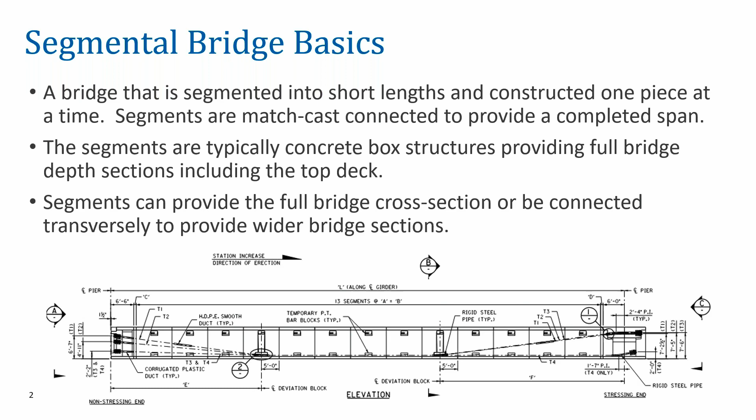The segments are typically concrete box structures providing full bridge depth sections, including the top deck. That's what makes it unique: the girder itself, with the top deck, is cast in one piece, comprising the full girder cross section, which is then assembled jointly together to complete the spans. The segments cast can either provide the full bridge cross section width, or for wider bridge sections, be done in individual pieces and connected transversely together at the erection site.

So why would your project choose segmental construction?

One of the reasons we're here today is the benefits that it offers for accelerated bridge construction. It provides a repetitive process for efficient construction, and constructing the full bridge section minimizes forming and finishing work at the construction site. You may utilize them in complex site and environmental constraint conditions, and the segmental solution can provide a reduced footprint and offer top-down construction in these occasions.

It may also find use for economical long span bridges, and they're particularly well suited for elevated viaducts and rail transit bridges. The narrow piers and narrow girder soffits require minimal clearance in confined areas, so bridges can be built in the medians of existing right-of-way. The bridges can also follow the curvature of the rail, and in transit bridges, the rails can be positioned directly over the webs, reducing the demand on the top deck and making for a more efficient structure.

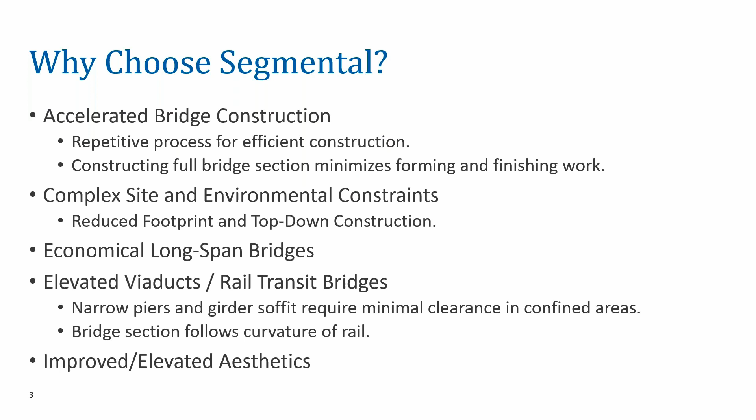They also offer improved elevated aesthetics if that's a desire for your project. So ABC and segmental bridge construction, how do they fit together?

The mission of ABC is to reduce the societal cost of bridge construction by reducing the duration of work zones, focusing special attention on preservation, service life, construction cost, education of the profession, safety, and development of a next generation workforce fully equipped with ABC knowledge.

An important component of that is reducing the duration of work zones. The less time that the traveling public is impacted, the more benefit it provides to the traveler, reducing costs, and potentially even improving revenue for the owners.

Precast segmental construction can meet these objectives by providing rapid precast segmental erection techniques, reducing the construction footprint, which thereby reduces the impact on travel lanes and disruption to the traveling public. Special erection methods can be implemented to reduce traffic closure durations, so operations can be performed at night or during weekends, during minimal hours, and the facilities reopen during peak travel times.

The Federal Highway Administration Accelerated Bridge Construction Manual states that precast segmental construction can be considered an ABC method because it's faster than cast-in-place segmental construction. And I would add that it's also faster than cast-in-place bridge construction in general.

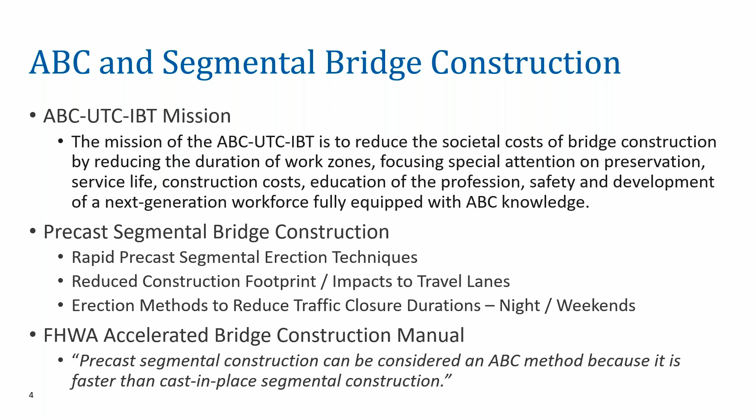Here's an overview of the general segmental bridge types. There are principally two methods used for segmental construction: the cast-in-place and precast balanced cantilever methods, and the precast span-by-span method. The remaining methods are really variations of these two primary methods.

The unidirectional cantilever method is a variation of the balanced cantilever, in which the same procedures are implemented, just done in one direction only. Incremental and progressive launching is similar to the span-by-span method, where the bridge is assembled at the end of the bridge and then launched into position.

Cable stay and extrados bridges are a variation of the balanced cantilever method, in which segments are erected first to the piers and then progressively out from the piers in a balanced fashion. Unique applications of segmental construction include arch construction, as well as precast segmental substructure.

One thing I'd particularly like to point out in the photo on the right is, as we look at the different methods being utilized, on the left side of that image is a traditional cast-in-place concrete structure constructed on falsework, and on the right side is the extrados precast segmental bridge construction. Transitioning from one to the other, you can see the congestion created by the falsework supports, which matters when you're trying to minimize work zone impacts and implications to the public below. You can visualize the open space created by the top-down construction of the extrados bridge in comparison to the cast-in-place on falsework method used on the left side of the image.

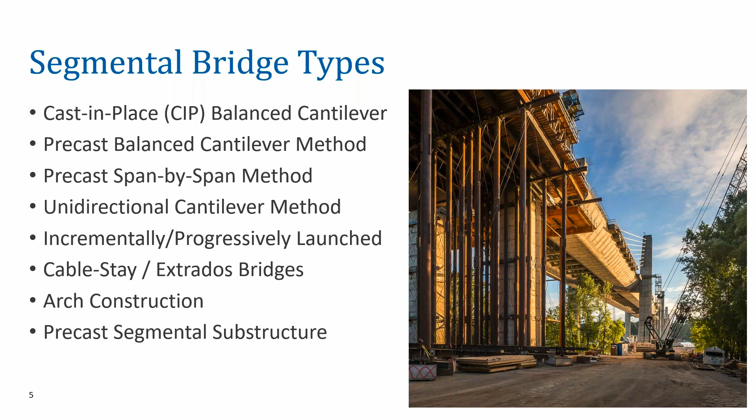Now, when does precast segmental make sense? Precast segmental can be an on or off-site prefabrication of segments, and it can be done in a controlled environment in a casting yard. This offers improved quality control, so segments can be inspected and rejected prior to erection.

This is particularly important because if an issue occurs during casting of the segment—a concrete pump issue, delivery issue, the material not being as intended, or a defect during casting—that segment can be separated, disposed of, rejected, and replaced prior to being implemented into the final structure at the erection site. It's a lot harder to do this when you're actually at the erection site and build a piece that does not conform to the project and has to be removed. A significant advantage of this approach is also that it can be protected from weather.

As you see in the photograph, this was a project in Minnesota that required year-round casting, and the weather could not accommodate that. So casting these segments was performed indoors in a controlled environment where temperature could be controlled and provide better access for workers. After casting, the segments were taken out on rails out of the building into storage prior to being transported to the erection site.

The precasting provides a repetitive factory production process, so you're replicating the same procedure every day with all the equipment where you want it, and you're able to keep everything organized and repetitive. This reduces errors that can occur, improves efficiency, and improves safety.

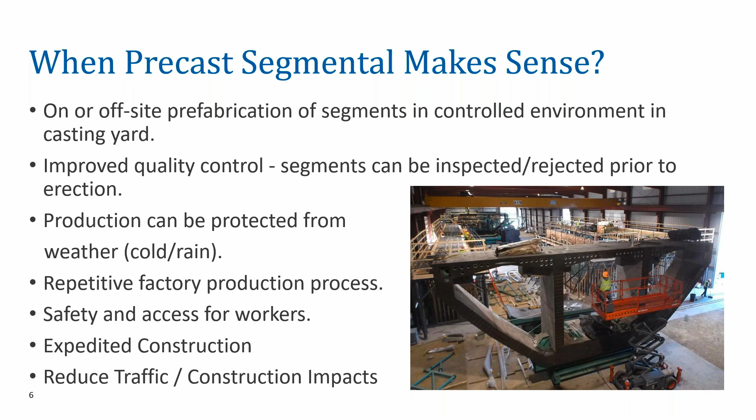It also offers expedited construction and can reduce traffic and construction impacts at the site. Another advantage is that if your project is in a rural area and you have a difficult time getting laborers to that site for fabrication of the bridge, the precast yard can be set up off-site in a location that is more readily available for your workforce.

Some considerations for precasting segments: depending on transportation and hauling restrictions, your girder depth may be limited. If you're hauling on traditional highway routes or through town, the size of the segment has to be limited to fit within the confines of that hauling route. So you often have segment limitations of 10 feet deep, and using those segment depths you can achieve spans up to 275 feet using the balanced cantilever method.

If the casting yard is on the water and your project is on the water with barge access from the casting yard to the project site, allowing barge delivery of the segments, that reduces some of the restrictions on segment size. In that case, larger segments can be transported, supporting up to 450 feet for balanced cantilever construction in the precast method, and up to 1,250 feet for cable stay bridges using precast concrete construction.

There is economy of scale, and this is often a question that comes up. We've seen projects need about 200 segments or more to be economical, unless other conditions influence the cost.

What we find is that if there are specific conditions that warrant the use of segmental or top-down construction, where other access to the site would be more costly, you can have segmental bridges with less than 200 segments. But you do need to consider the forms for casting those segments. Again, it's a scale issue, so you can accomplish that with smaller casting yards and fewer beds for operation, which reduces the upfront cost of some of the formwork required.

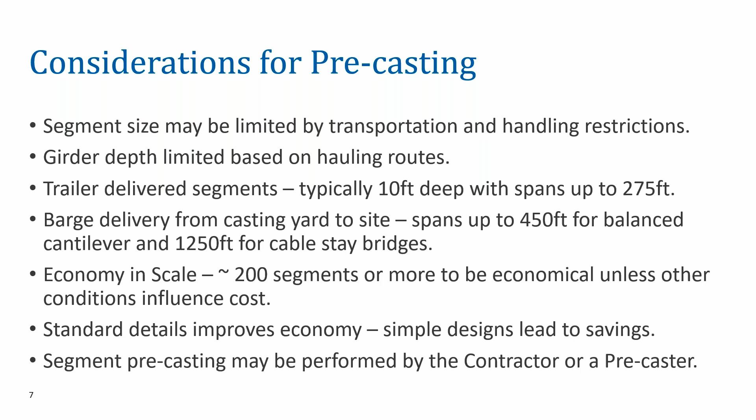Casting operations: you've got delivery of the equipment to the casting yard, and the operation involves reinforcing that's pre-installed in a jig, which is really just a frame set up to mimic the shape of the segment, so you can pre-assemble that cage.

The cage is then picked and flown into the forms and lowered in. All post-tension embedded items are installed in that form, and a core form is inserted from the rear. What that core form does is create the shape of the inside of the segment.

This creates the shape of the segment and incorporates any of the blisters and blocks needed for erection and in-service conditions of that segment. Concrete is then delivered and poured, usually by ready-mix trucks. Occasionally casting yards will set up their own batch plant on site, depending on the quantity of segments and access to concrete delivery.

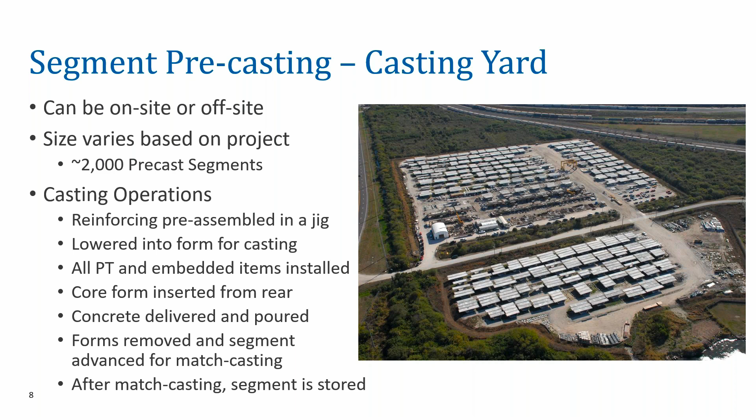The typical cycle for precasting operations like this is a one-day turn cycle, so every single day you're turning a segment. The segment's reinforcing cage is installed, the segment is cast, and the next day that segment advances into position for match casting while the subsequent segment behind it is cast. You can repeat these operations on a daily cycle. After match casting, that segment is moved out into storage, waiting for transport to the erection site.

Some standard precast segment handling: your typical segment, when dealing with segments transported on the highways, is usually in the range of 10 feet tall and 10 feet long. That works out to a common value of about 70 U.S. tons, 140 to 150,000 pounds.

Once it gets to the erection site, that segment has to be erected adjacent to the previously erected segment, and the slings would prevent those segments from coming into contact with one another. So at that location you've got sleeves or holes cast into the top deck. PT bars are inserted through those sleeves, and a frame is attached to the top that the erection equipment can use to pick that segment and adjust it, manipulate it into position for erection.

Another alternative is embedded PT bars. The disadvantage there is that you lose that material every segment that you cast, as well as with PT strands and lifting loops that you're accustomed to seeing in precast girder construction.

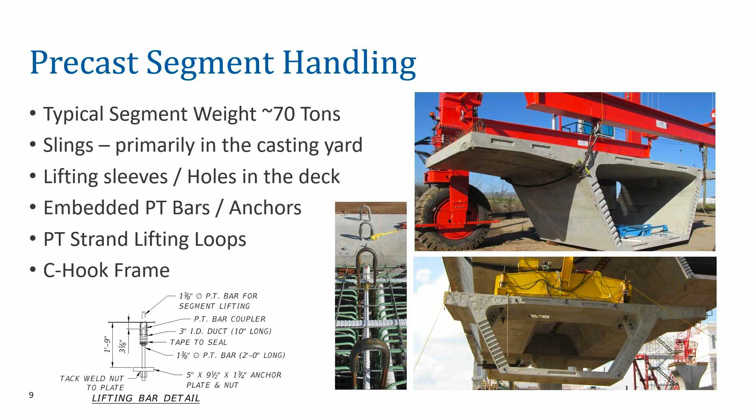Typical equipment is your ground-based or barge-mounted cranes, which is typical to any bridge construction, use of falsework towers and stability props. Stability props are primarily used in balanced cantilever construction to stabilize out-of-balance moments. And then you have specialized equipment, which includes the underslung truss and overhead gantry, lifting frames, and mobile lifters, which we'll talk more about.

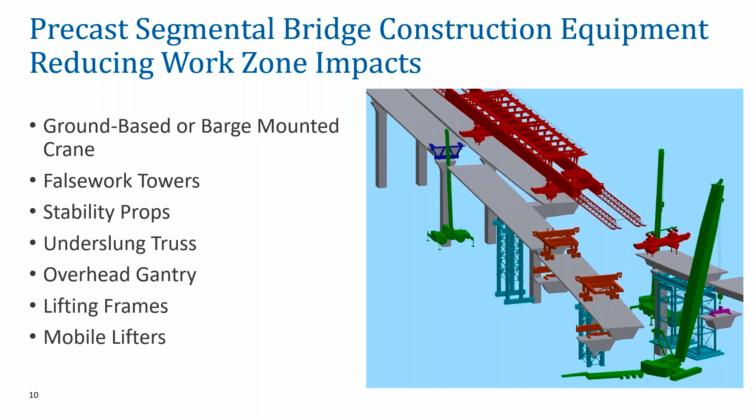Here we look at the span-by-span method, which was the predominant method used, especially in rapid construction for segmental bridges. In this application, it is literally what the name means: spans are erected one span at a time, so the bridge is completed span by span. The full span of segments is supported from the erection equipment that you're using. Depending on the type of equipment, every segment is delivered to the site for that span, suspended from the equipment or put on top of the equipment, and is aligned and connected to each other. They can have alignment closures at the end or not.

Alignment closures are really just cast-in-place closures that are usually fairly small, 6 to 9 inches. Those closures are used to close any gaps that may remain at the end to make connections between your bridges to meet the specific location that you're trying to satisfy.

The PT is installed and stressed in that span, and the span is now self-supporting, so it can be released from the false work. That span is complete, and the false work or erection equipment can then be advanced on to the next location.

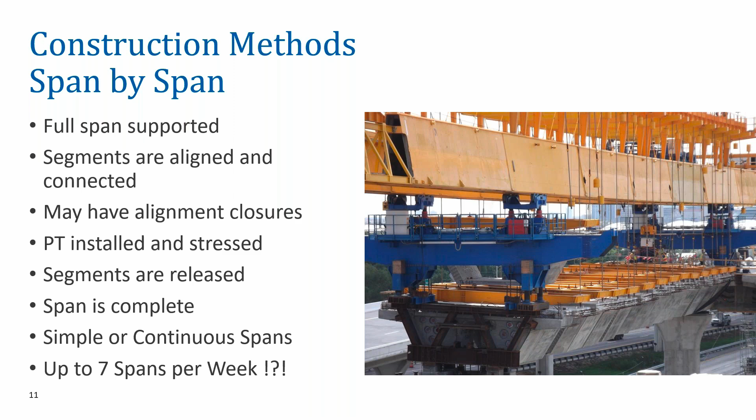anticipating construction durations. So one method that can be used for span by span erection is the false work support system. This is a very conventional system. It's not typically been applied in segmental bridges, but it's obviously used throughout bridge construction elsewhere. These are segments that are erected by ground-based cranes, and they're set on false work towers and assembled together.

The advantage of this system is that you can provide multiple headings with non-linear sequence, and it accommodates bridge geometry. So the curvature of the bridge doesn't require a corded support of a piece of erection equipment trying to suspend that curvature. The false work towers can be aligned as needed to fit the geometry of the bridge.

Segments are brought to the site and erected onto those tower legs and assembled, creating a fairly easy, fairly conventional operation for this assembly of segments. It does require site access and well-graded, stable soils.

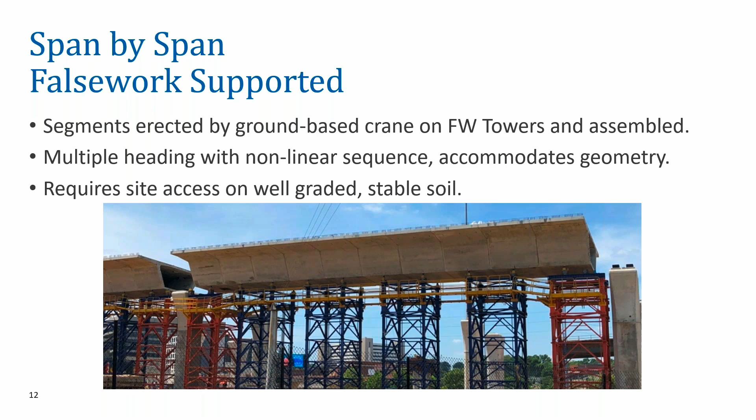And so that is one area which is a little bit contrary to what we're talking about in limiting work zone impacts. However, the trade-off is that this can be done very rapidly, so you're minimizing the amount of time you're on site by utilizing this method. It does require you to have full control of that site, so it is one trade-off.

One project that utilized this was the I-59/20 Central Business District bridges in Birmingham, Alabama. This project had over 1 million square feet of deck, including 2,316 precast segments, with 4 girder lines each about 1.25 miles long.

You see that in the photograph to the right, how those girders were assembled, and then the right 2 girders and the left 2 girders are connected with longitudinal closures to provide full eastbound and westbound directions of this interstate system. The typical span length is 165 feet, with 172 total spans for the project.

It was delivered using the traditional design-bid-build method and had a winning bid price of $195 million. Because of the commitment of the Alabama Department of Transportation to the public as they were replacing this interstate system in downtown Birmingham, there was an incentive of $250,000 per day, up to $15 million, for early completion. Likewise, there was a disincentive for late completion of $250,000 per day, and that disincentive had no cap.

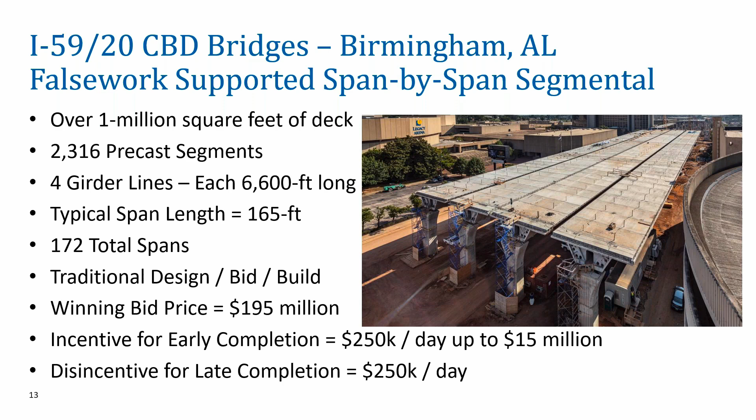Now, why was segmental chosen for this project? It was determined to be the only option that could be completed within a 12-month shutdown. That was one of the criteria from the Alabama Department of Transportation. The schedule was actually a 14-month duration with a desired 12-month duration, so the incentive was to get to the 12-month shutdown, and this was determined to be the only method that could be utilized for this project to accomplish that.

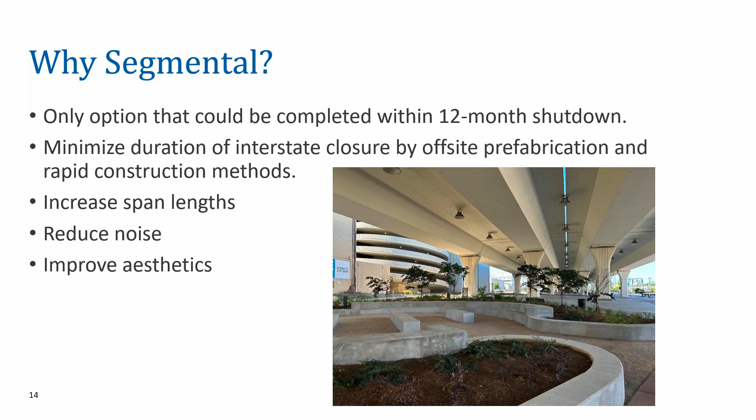It minimized the duration of interstate closure through offsite prefabrication and rapid construction methods, increased the span lengths for the community, reduced noise, and improved aesthetics.

3 days later, the contractor began demolition of the existing facility. Approximately 6 weeks later, the very first segment was erected. So from beginning demolition of the existing facility, to completing the substructure, to installing the falsework, to erecting the segment, took about 6 weeks. About a week later, demolition of the entire facility had been completed.

Then in August of 2019, the contractor had completed casting, which is an important milestone on any project.

It's important to plan that work so it occurs prior to needing that last segment for erection. You need curing time, typically 28 days—segments should be cast anywhere from a 14-day minimum to 28 days prior to erecting. But you also don't want to end casting too soon, because you'll create too much backlog and inventory in your yard and run out of room for storage. So there's always a balance between precasting segments and delivering them to the erection site in time to relieve yard space while still having segments ready for erecting.

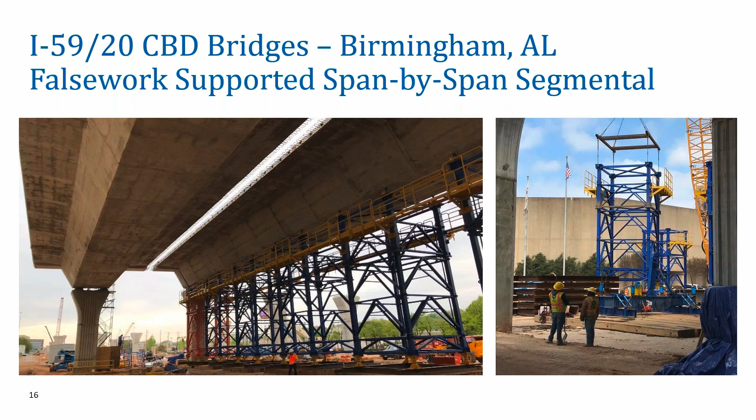This was really accomplished by using light, easy-to-maneuver equipment. You can see on the right individual towers that were easy to side-shift and relocate, allowing the contractor to move equipment throughout the project site and work around any constraints encountered. Now, how did this really happen?

So we have all segments from first to last erected: 2,316 segments erected in 217 days, over 10 segments a day on average from start to finish of segment erection—also at a rate of nearly a span per day on average.

To accomplish this rate, you think of the premium cost that results, and look at the bid price for that project. That project was completed at $195 a square foot, which was very competitive with other alternatives throughout the industry at the time. Further, the $15 million incentive to the contractor was sufficient for them to perform that work and accelerate the project by 60 days.

Every activity he took into consideration was whether it would cost him more than $250,000, or whether he could make money on $250,000 to accelerate each day he had activity—that was enough incentive to accelerate it. So when you look at these durations as averages, there's a lot of variation from startup to the end of the project.

You hit peak duration at different times, but it was really accomplished, and what was key to this was that at peak production it was performed using 8 headings. There was no single span completed in a day, nor a particular location where 10 segments were completed in a day—but on average that was the production rate using, at maximum output, 8 headings. The project originated with 1 and 2 headings to start up, built up to 6 headings, and eventually to 8 headings to hit these production rates.

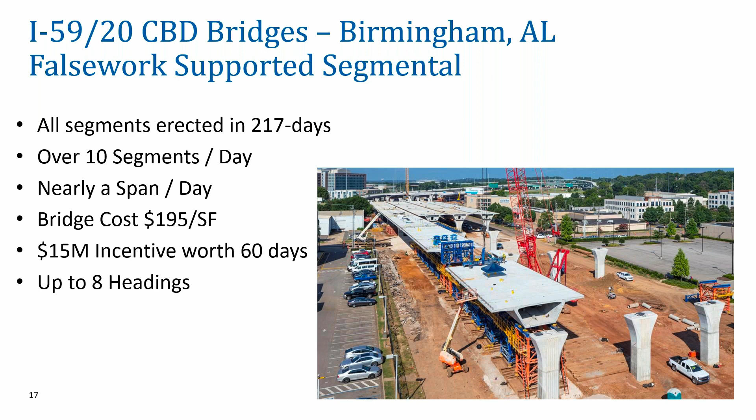One limitation here is you really need primarily linear construction, so you don't have the flexibility with this piece of equipment to move from position to position.

It needs to move progressively along the length of the bridge, and it's best suited for long, continuous straight sections with supports founded on the piers. The importance of the straight section is that if you encounter a curved bridge alignment, your equipment is fundamentally chording that length. As you work your way around a curved alignment and the equipment starts to chord that section, you're going to run into situations in which you can't make that rotation. The tail's going to run into your box, or it's going to swing out too wide past where the wing supports can accommodate anything on that tail. So you need something that's fundamentally straight or limited curve to utilize this type of equipment.

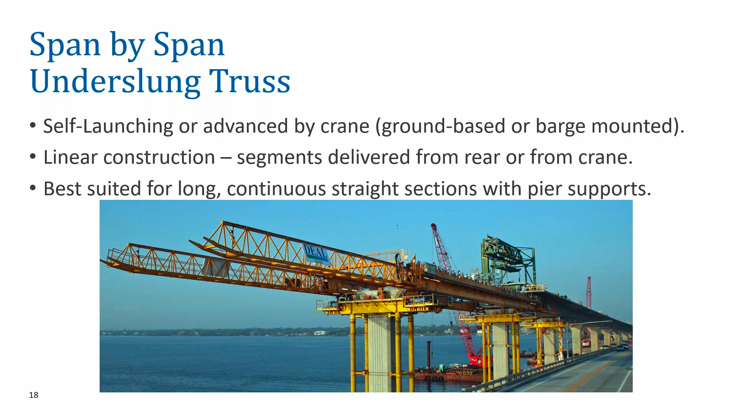You can reduce that requirement by removing the nose and tail, and then using a crane to suspend the front of the equipment and a hook on the back to support the back of the segment during launching operations.

A very similar operation is the overhead gantry, also self-launching. This can move the supports with it, sitting on top of the bridge instead of below it as it's constructing, providing that top-down construction method. Segments can be delivered, just like in the underslung truss, from the rear from previously completed spans, or they can be delivered beneath the gantry itself and hoisted into position. Because it operates on top of the box, on top of the structure, it has more flexibility when it comes to handling curvature and alignments. It's able to navigate those more easily.

But it is still limited in how much curvature it can accommodate, so very tight curvatures might require an articulating nose or tail. It's also a large piece of equipment, so relocating it on your project site is lengthy, and assembly is lengthy. It is expensive - probably somewhere in the range of $5 million for this piece of equipment, so you want to consider that in the upfront cost. However, one trade-off is that these pieces of equipment are replacing, in many cases, the use of cranes or other falsework systems that would otherwise be required, so there is something it's replacing that has cost as well. It's not just a standalone cost.

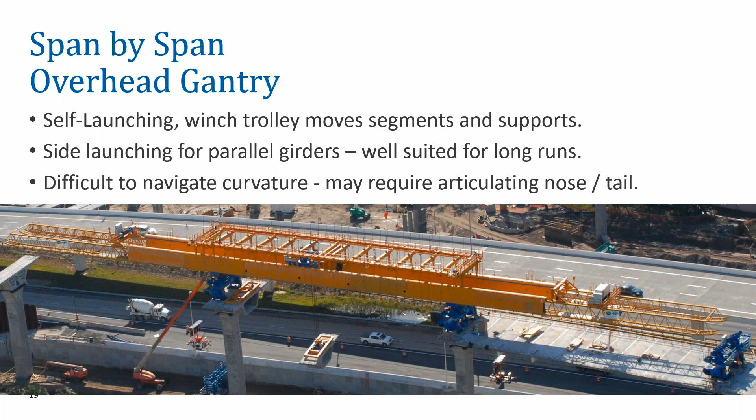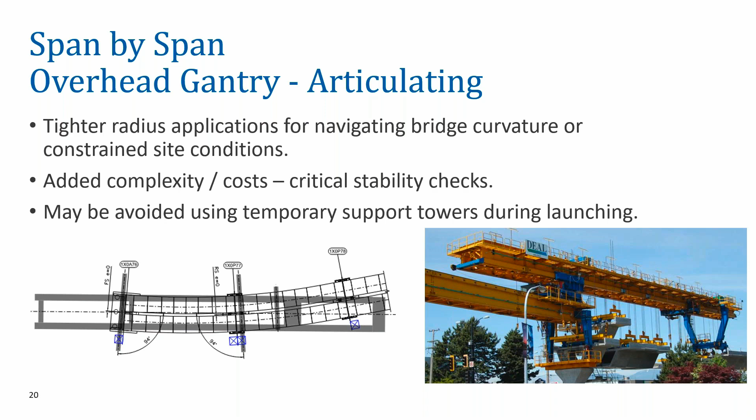One way to avoid this, if you have the real estate on the project site, is to have false work towers that serve as outriggers to facilitate the movement - both for this and for the overhead gantry that is not articulating. Another advantage, as you see in the photograph, is that it's particularly well suited for parallel girder erection, in which the gantry can side launch as well as launch longitudinally. It can side launch between girder alignments, so in an application like this - a transit rail system with parallel girder alignments - it can erect a right girder alignment, side launch, erect a left girder alignment, recenter, advance to the next pier, and repeat that operation along the line.

Now we look at the other primary method of constructing segmental bridges: the balanced cantilever method. Similar to span-by-span being reflective of how it's built, balanced cantilever is reflective of how it's built. You start at the pier with the segments and progressively build out from the pier in a balanced cantilever fashion, erecting a downstation segment and a matching upstation segment that balances it. You progressively do this along the length of the cantilever, erecting segments on both sides to maintain a balanced condition.

There is false work required, often provided at the pier, supported on the permanent foundation. It's a wraparound out-of-balance false work system, or alternatively can be provided using a stability prop out on the cantilever that provides resistance to overturning. Standard cycles you can expect here are typically one pair of segments every day - a downstation and upstation balancing segment can be expected every day.

Those segments are erected and cantilever tendons installed through those segments to secure them into position prior to erecting the next pair of segments. That can be increased on projects up to 2 or 3 pairs per day if there is incentive for the contractor to do that.

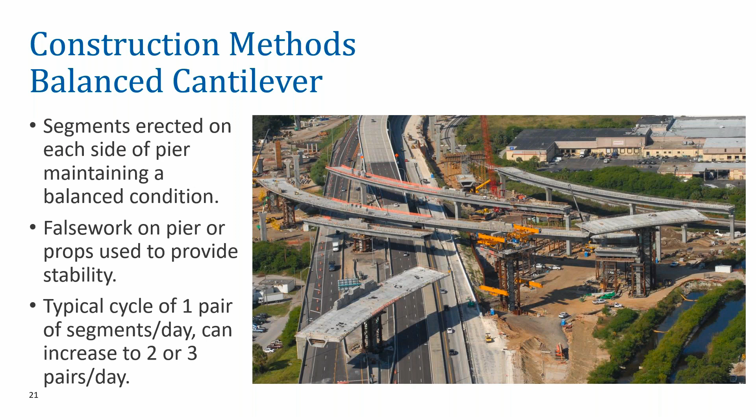Here we do see a similar application, but crane construction is being used - this is a ground-based crane erecting cantilever segments. You can see here on the cantilever on the left, this was previously completed while the traffic was shifted more towards the right, where the crane mast can be seen in the photograph behind the barrier. Once that cantilever was completed, the alignment of the road was temporarily shifted back underneath that cantilever, so the cantilever you see on the right could then be progressed using crane erection.

It's important to note that while this activity is occurring over traffic, segments are not actively being erected over live traffic. This is either done during night closures, or in this case, as the traffic has been shifted out of the envelope of those segments being erected. Segments are supported by the crane until the temporary PT bars are installed, and once the balancing segment is erected, the cantilever tendons are installed and stressed, and that pair of segments is complete.

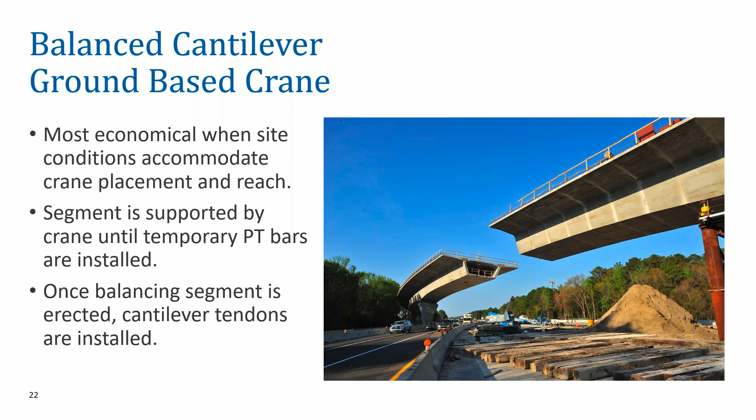Here we look at another method of the balanced cantilever equipment that can be utilized, which really reduces the need for cranes in this situation. These kind of mimic what the crane would be doing, but when you don't have the footprint for cranes and access to get the cranes into position, this is a beam and winch or a lifting frame that attaches to the top of the previously erected segment.

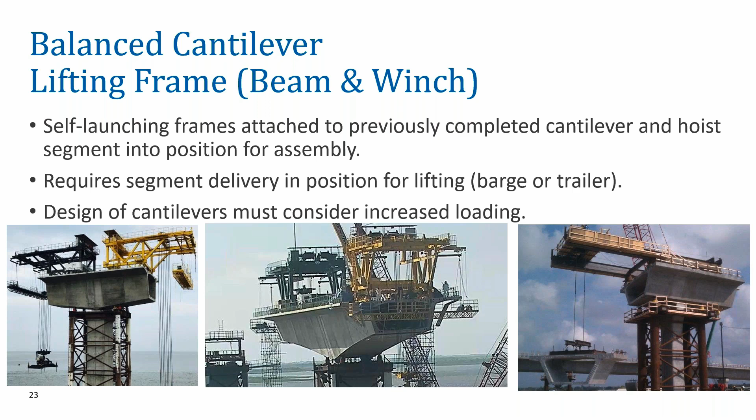As it erects segments, it advances out onto those segments that it previously erected for erecting the next segment. This particular piece of equipment does require the segments to be delivered directly underneath or very close to directly underneath where they will be lifted or hoisted into position, because the cables running down to pick that segment are in a fairly fixed location. One important note is if you're anticipating that your project will need equipment like this, the design of these segments needs to consider the weight of that equipment in your design, as it will often weigh as much as a segment and result in additional post-tensioning required in those cantilevers during erection.

Next, we look at another piece of equipment for balanced cantilever erection, which is the mobile segment lifter, which fundamentally operates very much like the beam and winch or lifting frame, except the advantage to this piece of equipment is it can actually pick a segment and travel along the length of the cantilever. What you see here is a segment being delivered over a railroad - it was delivered back further closer to the pier and lifted by the equipment, and then can travel out into position. It travels to the end of the cantilever, locks down, advances the segment forward, hoists it into position, and then the segment is attached to the end of the cantilever.

This was done using pairs, and so you can see we've got on both sides of the cantilever segments being erected. Generally, the equipment is used in coordination with each other to keep them within similar limits along the length of the cantilever to maintain your balance given the weight of the segments.

If you do have a piece of equipment and you don't have a balancing one, you've got to account for that either with counterweights or a stability prop, as you can see in this photograph here.

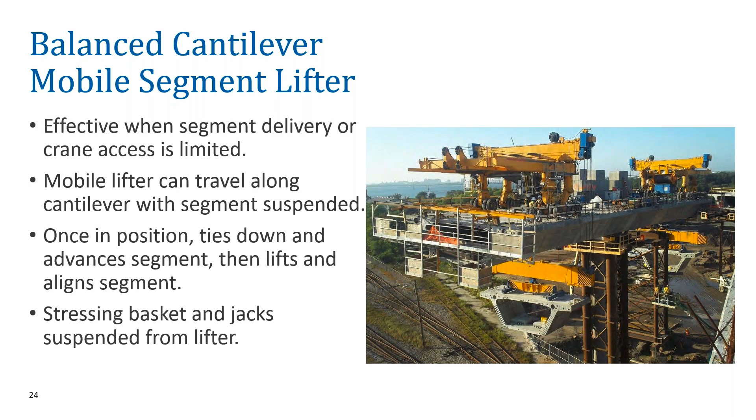Mobile lifter, again going back to reduction of impact to your work zone. Here you see them being used at a railroad. This was another project, and the segment delivered again back by the pier, lifted, hoisted by the piece of equipment, travels along the length of the cantilever, locks down, and advances that into position.

When you've got a crossing, building a bridge over a rail corridor, the ability to move a crane out across there, get into position, pick a segment, deliver a segment, install that segment, fouls the tracks, and is often a requirement of the railroad that you're not able to construct in that environment. So this provides one solution in which either during a temporary outage or service disruption to the line, the segment can be delivered outside the right-of-way of the rail, then hoisted and delivered out and erected prior to service being restored.

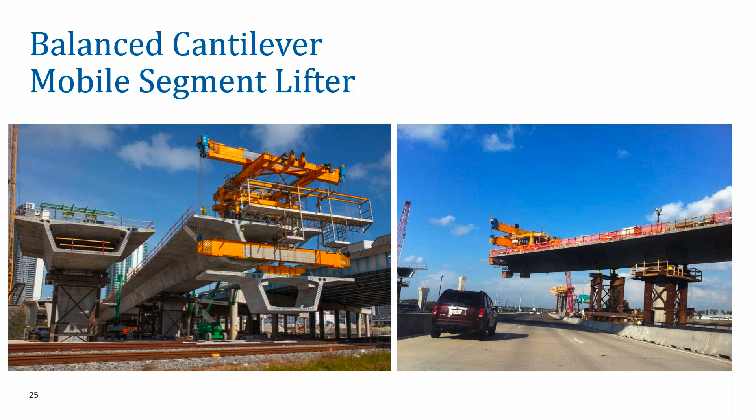You see a similar operation on the right side. This is again equipment being used to erect segments over the roadway, not erected during active traffic. This equipment was left in this position from the previous night shift. Traffic was then open that morning, operates throughout the day, and then during the subsequent night shift, the segment will be delivered and installed, continuing this cantilever method.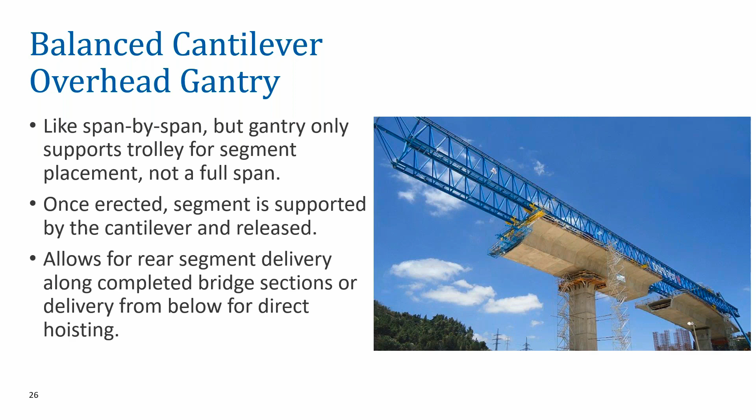The last one we talk about here is the overhead gantry, very similar to what was used for span by span, except the primary difference is that the equipment only has to support one segment at a time. It picks a segment either from behind or from below, brings it up, and can move it to the up station or down station. This is advantageous in situations where crane access would be really prohibitive on a site, allowing you to go back to this top-down construction and limit the footprint and work.

Now we'll touch a little on precast segmental substructures. This is another system used to accelerate the process, very similar to what we do in superstructure construction. Segments are precast in a casting yard, either on-site or off-site, match cast against each other, then separated, stored, delivered to the site, and erected to recreate what had been done in the casting yard.

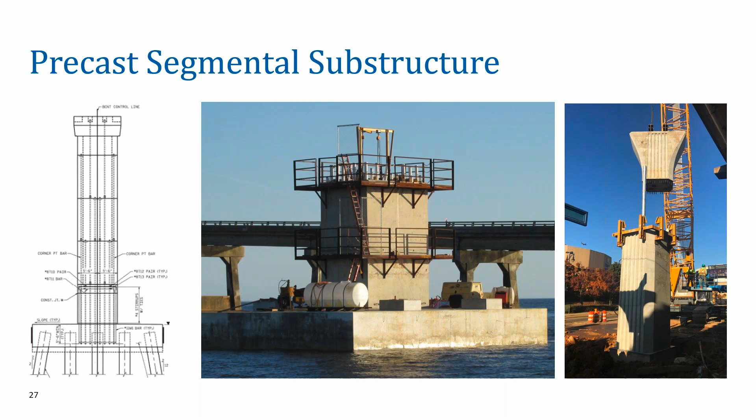Here you can see when they have the entire corridor shut down and they're doing a replacement of the interstate system - this is the construction of the pier columns. As they were constructing these, since they had the foundations in place prior to demolition, the delivery of the segments was primarily in two pieces.

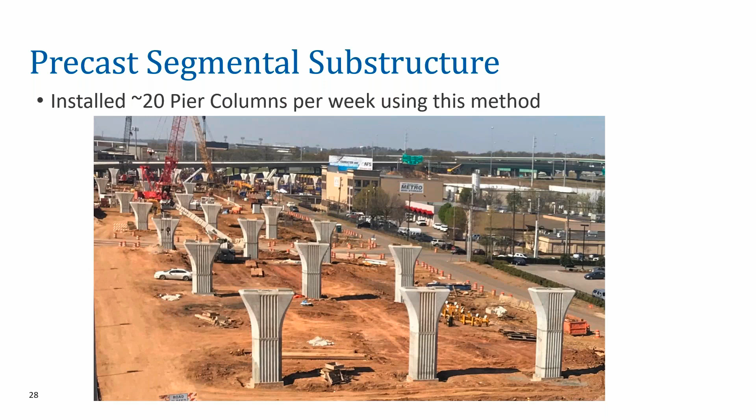The segmental bridges, since the geometry is handled in the girder itself and not in the piers, are very repetitive. You just have a standard cap shape and a standard column shape, and the only variation is in the height of the column, which is accommodated in the straight portion of these precast elements. With two pieces cast, the contractor utilizing this method was installing approximately 20 pier columns every week at this project site, preparing for erection of these girders.

Some lessons learned as we look at this type of method, particularly when trying to achieve accelerated construction: solve the problem before it occurs. ABC projects require a commitment from all parties, and what may be a standard solution you're accustomed to on a typical project may not be appropriate for this particular application. Simple designs and details lead to efficient construction.

Something we often say is if it's hard to draw, it's going to be harder to build. If you're really struggling to put something down on a piece of paper, imagine what it's going to take out in the field to get that done, which adds to cost and duration. So figure out how the bridge will be built first, then design and detail it. We often find that the actual construction of the project dictates the type of design and what needs to be built. Maybe not the most efficient design, but if it's the most efficient construction, it provides cost savings to the owner.

We always want to leave room in the design for construction. We all want to be efficient with our designs, but things do happen during construction, and having some flexibility or additional capacity often results in savings in the field when things don't go the way you want. Have a plan for when things don't go as planned. Anticipate issues that may occur and know how to address them ahead of time. This is where your experience from previous projects really can pay dividends on the next project. You can realize what things did happen, try and address them in the designs, make sure there's a plan in place for when they do happen, so that you don't have a lengthy shutdown that affects your overall schedule.

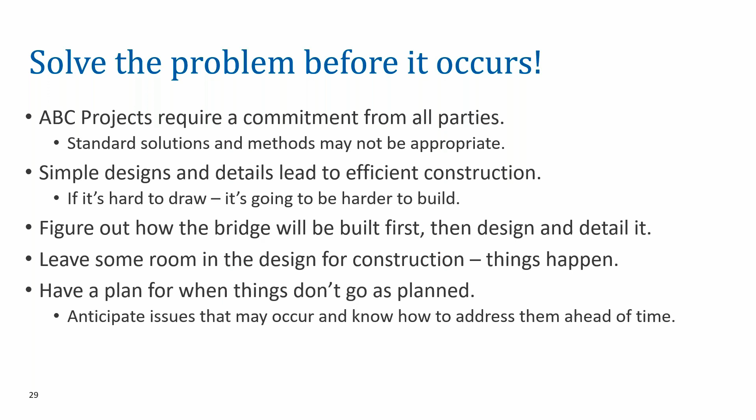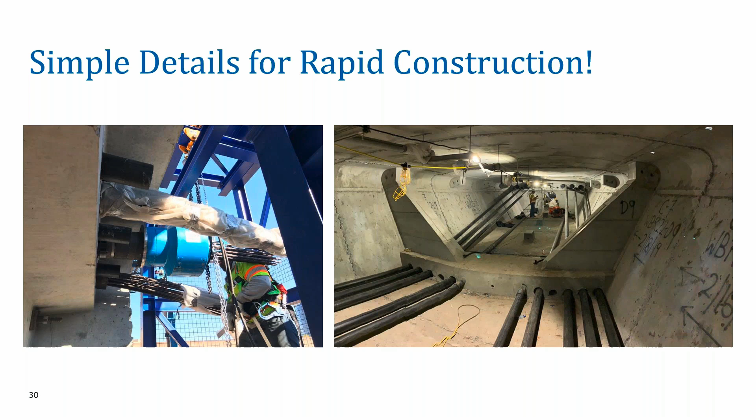Simple details for rapid construction. Here are a couple of examples. Having access to tendon stressing from outside the bridge just makes a repetitive process easier to work with, and gives you better access than trying to get inside the bridge and stress tendons from that position. Utilizing details like external tendons passing through diabolos and deviator segments keeps everything external, prevents blocked ducts, and limits the amount of issues you encounter during construction. So if it's an option when you're looking at your designs, incorporating some simple standard details that provide more flexibility for the contractor can certainly pay dividends during construction.

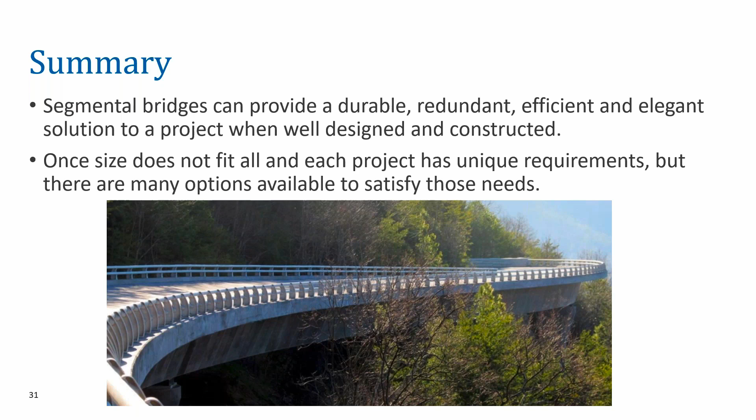In summary, segmental bridges can provide a durable, redundant, efficient, and elegant solution to a project when well designed and constructed. But it is important to note that one size does not fit all, and each project has unique requirements, though there are many options available to satisfy those needs. Just because you may have seen a project that was a segmental bridge constructed a certain way, doesn't mean that that's the right fit for the next project. There are a multitude of ways of doing it, and each one has its unique benefits.